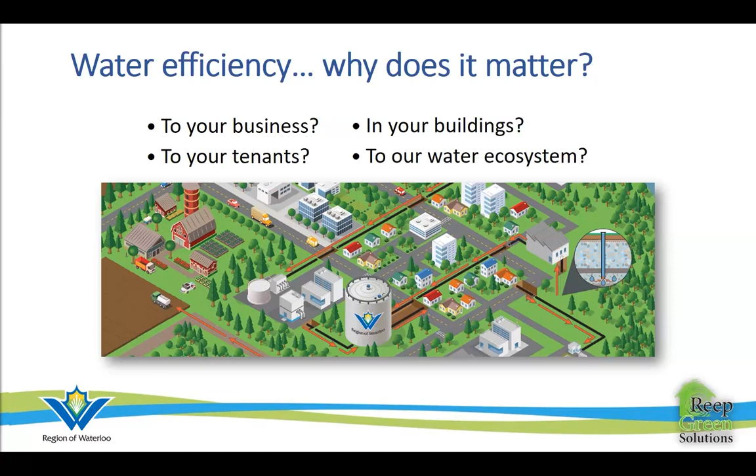And then again, educating tenants to recognize water loss problems and report them is also a great opportunity to lower our building's water consumption. Thanks, Nicole. That's a really great overview. More specifically, maybe you could dig into some of the benefits to property owners, and why they might consider replacing their water fixtures. Sure. So in multi-residential buildings, the water use can be out of your control if you have tenants.

You can try providing reminders and tools to promote water efficiency in your units, like shower timers or links to some of our webinars on our website and posters. But you can also try replacing water fixtures and or upgrading water appliances. By replacing fixtures, like upgrading to 3-liter per flush toilets or more efficient shower heads, you can save money on your water bills. You can help to discover and fix leaks in your buildings and protect our resources. You can also promote your building as a more environmentally friendly building to future tenants with the use of the newest water efficient fixtures and technologies.

You can also benefit by receiving money from the region, either through our toilet flapper and fixture replacement program or our multi-residential funding program. And if you're wondering if your tenants have a higher than usual water bill compared to other buildings in the region, consider this. The average person in the Region of Waterloo uses approximately 4.5 cubic meters of water per month. And if your water bills are higher than this average, then you're considered a higher than average water user.

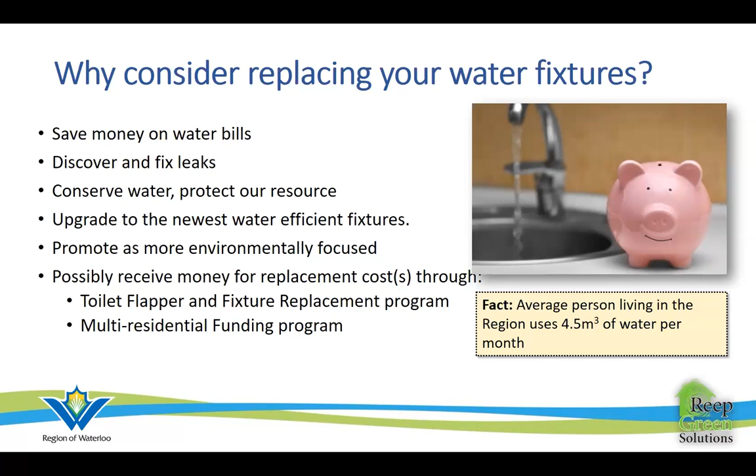So the region offers support and funding to make water efficiency projects easier through a variety of programs. One of these programs that we have is our toilet flapper and fixture replacement program. It offers participants an instant $15 rebate for every toilet flapper replaced.

And when you apply for the program, you can also request free water efficient shower heads and tap aerators that we at the region would ship to you so that you can install as part of your project. And this program really benefits buildings with suspected toilet leaks and/or older fixtures. It's recommended that the toilet flappers in general be replaced every 3 to 5 years because they can degrade.

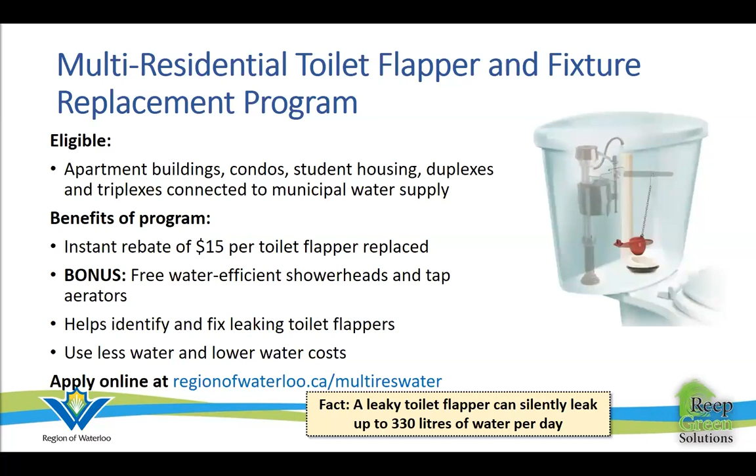So it's a really great opportunity for you to increase your water savings while also receiving an instant rebate from the region, and again, the free shower heads and aerators. Something to keep in mind, a leaky toilet flapper can silently leak up to 330 liters of water per day. So that can really add up on water bills. And if you're interested in applying for this program, you can apply at regionofwaterloo.ca/multi-res water.

So we do have a couple of success stories. The one I'll talk about is we had a participant who replaced 73 of their toilet flappers in an older apartment building. And with this one small switch, they saved more than 2,000 cubic meters of water per year, which is equal to savings of more than $12,000 for the year for the building. And since the cost of the toilet flappers actually were rebated by the region, the only cost of the project were the plumbing costs. And this participant actually saw a payback period of less than a year.

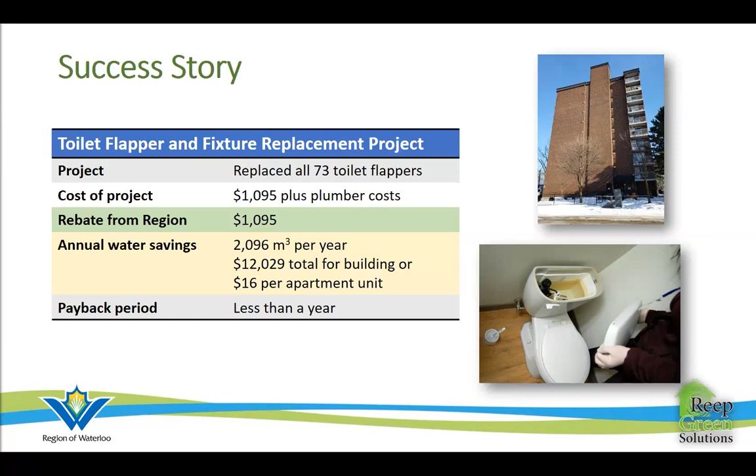One thing to keep in mind is that buildings with above average use of water are more likely to see a greater impact from replacing toilet flappers alone. And then the best way to see the maximum benefit from this particular program is to replace all the toilet flappers in your building. It's also a great opportunity to educate your tenants on possible signs of a leaking toilet, like if there's continuous running water. They can also use food coloring to test for leaks and things like that.

So we actually have another program that I'd love to tell you about, which is our multi-residential high-rise funding program. And this program is a good fit for larger buildings and for those who are okay having a longer wait for the funding, because funding amounts for this program are based on the total capital costs spent on the project, as well as the water savings achieved by the project, by which we look at the water used by the building the year before the project and the year after the project was completed. And then the building must also have a minimum payback period of at least 2 years.

And because of the way the funding is calculated for this program, using that water billing data from the year before and the year after, you might not receive your rebate for this program for up to 2 years post-project completion. So it's a bit of a longer wait than the toilet flapper fixture replacement program.

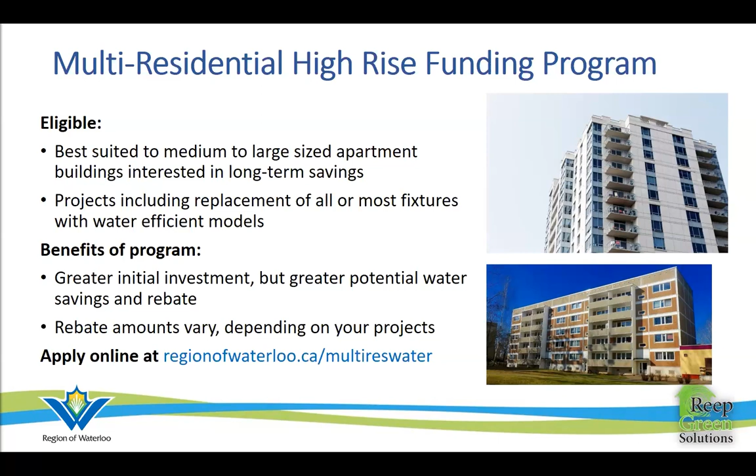And then the water savings achieved through this program also depends on the age of fixtures in your building. Like I mentioned before, replacing older inefficient toilets and shower heads has a bigger impact on your water use than newer ones. And then the size of the building, whether or not all of the fixtures are replaced or just some, the type of fixtures being installed, and then the typical water use in the building. And this program can also be applied to at regionofwaterloo.ca/multi-res water.

And I believe we also have the success story for this one. So water efficiency upgrades are worth it all on their own in the long run. But this success story demonstrates how the region can help support you in the process of achieving improved water efficiency and water savings. So in this case, a property manager owned a 140 unit apartment building and wanted to proactively reduce the per unit high water use. They replaced all of the toilets, the tap aerators, and the shower heads for all units in the building. And each unit had 2 bathrooms. So they actually replaced 280 toilets with 3-liter per flush models.

And then post-project, after calculating the water savings and the payback period, the region was able to provide this participant with more than a $5,500 rebate in funding. And the building also now uses 5,000 cubic meters less of water each year, and saw savings of more than $18,000 based on the city of Waterloo's current water rates at the time of the project.

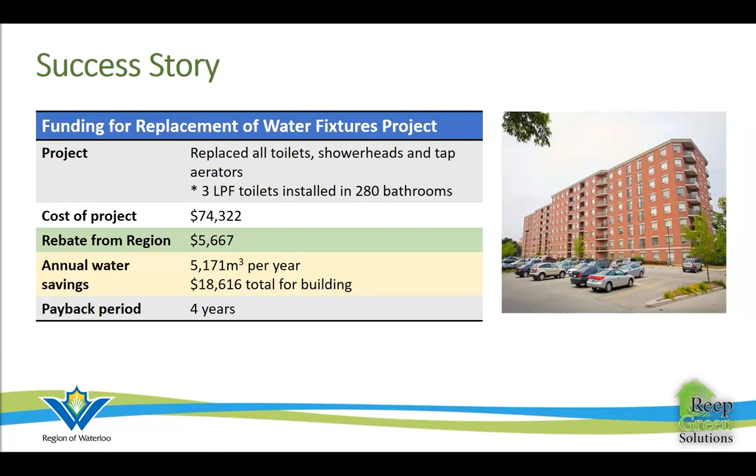So at this point, I'd like to bring Wayne into the conversation. So Wayne, I understand that metering water at individual units is a good way to achieve water savings. So what are some of the benefits you can tell us about from sub-metering? Okay, thanks, Patrick, for that introduction. Today, I'd like to talk to everyone about the value of sub-metering multi-res properties where there is only one single city meter.

So what the region does to help property managers fund this project is we do a 50-50 cost sharing. We split the cost, and there is a maximum of 10,000 per property, but looking at an average over the last number of years, it's about $250 a meter, the region's half, that you can receive for many units.

So eligibility: properties have to be connected to the municipal water supply system within the Region of Waterloo, and they need to have completed the installation of sub-meters at that property and provide me with a copy of any paid invoicing so that I can calculate the rebate payable. Now, not so much eligibility as practicality, the plumbing must be conducive to sub-metering installations, and I can talk a little more about that as I go through these slides.

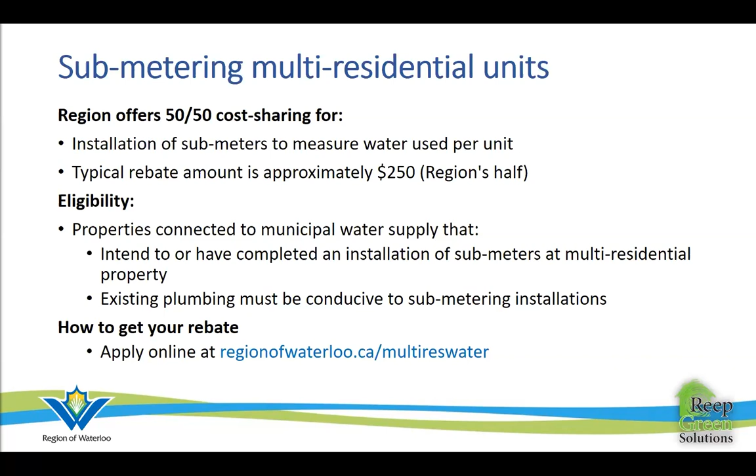As per Nicole's presentation, you would apply online for this program at regionofwaterloo.ca/multireswater, where you'll find all the information and forms required. So next slide, please, Patrick.

Thank you. So why sub-meter? Well, you can now bill tenants fairly for the water that they actually use, not just applying some sort of mathematical division, which if there's some sort of leak, like a toilet running, you're not going to know where it is. Everyone's sharing the cost of what is essentially one unit's responsibility. And so it's only fair.

Now, the bottom line is sub-metering a multi-res property will encourage water efficient changes in behavior that will lower the water use on average around 15%. And this has been shown because now they're being billed on their actual cubic meters of water usage, and any issues can be identified, located, repaired, dealt with. And as the next bullet says, it identifies leaks and high water use. It allows you to focus where your attention needs to be focused.

I have seen a situation where there was a leak under a unit in a townhouse complex, a lot of water running into the ground, and they would have never known where to rip up the concrete as they had to without some sub-metering.

Now, sub-metering companies can provide, of course, the supply and installation of the sub-meters, and they can provide data collection services. They can reconcile with the city bill, they can send bills to the tenants, and they can provide services up to and including collections of the monies owed.

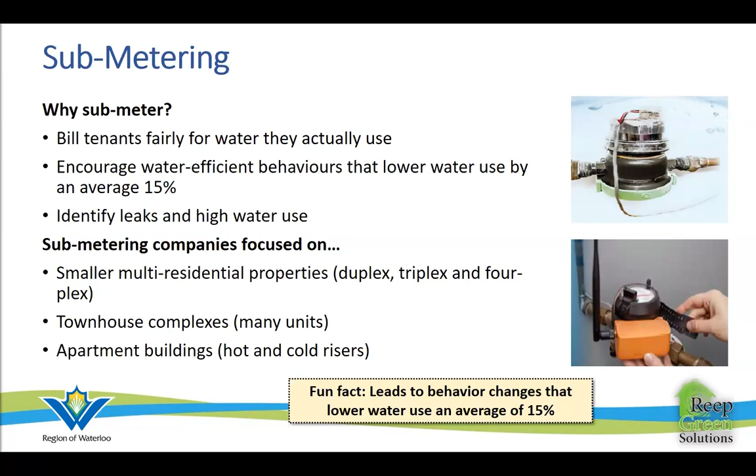So as far as case studies, the large townhouse properties, this is really where the program got going around 10 years ago, where each townhouse unit is submetered for individual water usage in cubic meters. The plumbing tends to be a bit more straightforward in townhouses. There tends to be one supply line into the unit. And in the last 10 years, I've done 19 townhouses. They've received funding for submetering, and that's a lot of units.

And they're apartment buildings. Now, because they're students, you might find in this situation they're probably not billing the tenants specifically, but they are receiving data on where the water's going. I know those places, they tend to have 4 students maybe in one unit, the way their architecture is arranged. At least you can focus your efforts as property managers on where to deal with it. Do you have to deal with tenants and say, don't leave that tap running, or do you have to fix something? So that's sort of the overview of submetering.

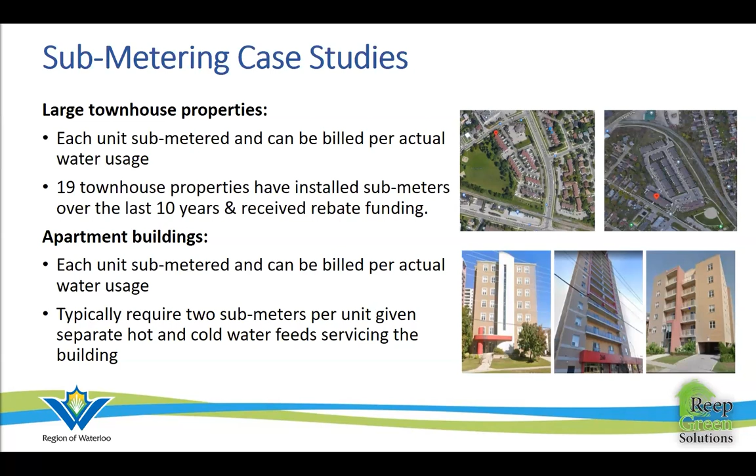So at this point, I think it's helpful to take a step back and better understand how to prioritize some of the water saving measures that Wayne and Nicole described. So Brendan, you've got a lot of experience doing water audits. What are some of the main things that you look for when you're doing a water audit?

Yeah, well, just to start off, what we typically do when we do a water audit on a building: we would do an on-site inspection where we come in and look at the fixtures in the building. We'd look at the mechanical room and the shared spaces, and then we'd look at the fixtures in some of the individual units. We usually do about 10 units, and look at the toilets and showers and faucets and any sort of appliances that may be in there, dishwashers or washing machines, that sort of thing.

We also install a smart meter on the main water meter. That was the orange meter that Wayne had a picture of in one of the previous slides there, and that allows us to collect some smart meter data. We can more closely monitor the usage, and we do that for about a week.

And it shows us each time of day how much water is being used, and that way we can do a little analysis of things like how much water is due to leaks. We can tell that by looking at the usage overnight, at times of the night when there normally wouldn't be any or hardly any usage. And so we do that for a week and then go back and collect that meter. And then we send a report that has an analysis of where the water usage is and things you might be able to do to reduce it.

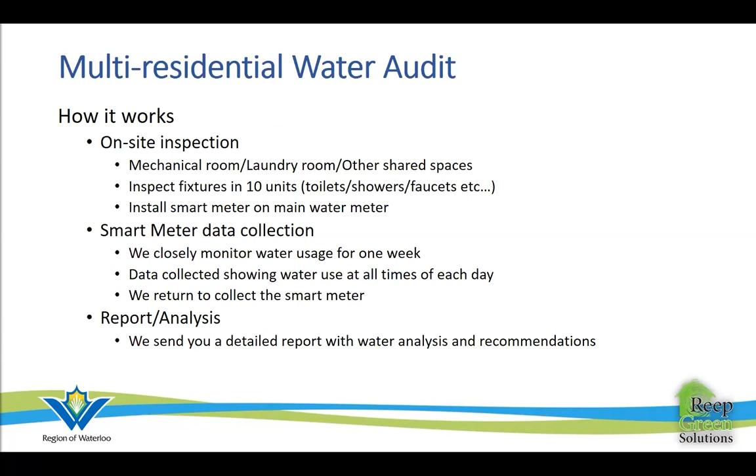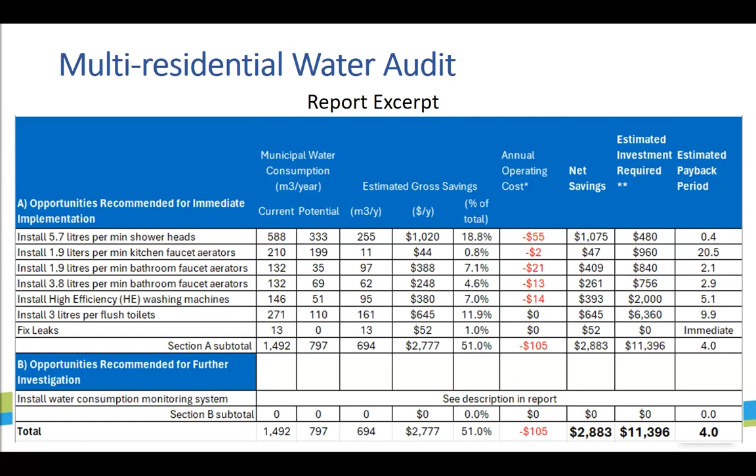On the next slide, this is part of the report that we would send. It gives a chart with where the savings opportunities are for each of the different fixtures or areas of the building. You can see on the left side there, it lists some recommended upgrades to make and the amount that you would save from doing that versus how much it costs to do it, and then it gives you an estimate of how long that takes to pay off. And as you can see, it's a pretty detailed analysis, and you can then decide which of the fixture replacements are going to be your better bet and pay off more for you.

Certainly it takes time for that to pay itself back, but the savings just keep on going even after that payback period. The next slide is larger buildings. You can see it's a little bit even better payback on these. These are actual buildings that we've done, so this is not theoretical but more practical, hands-on. This is what we've seen in terms of the possibilities for these buildings. And you can see the average is 36% return on investment, which is obviously a huge return on investment. So it really is a good business decision to do some of these things that are going to make a big difference.

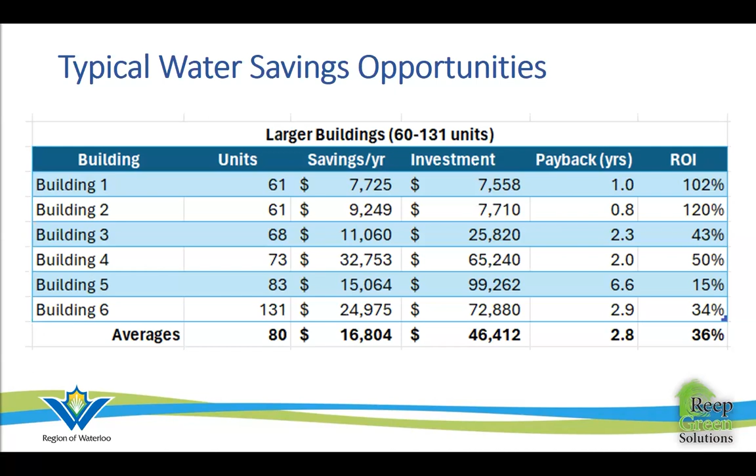In the next slide we have some different types of upgrades that we recommend typically. Fixing leaks is a really big one, and it's kind of a no-brainer. Usually it's toilets that are leaking. That's the most common, and that's usually a pretty simple thing to fix. That's fairly inexpensive. Usually it entails just replacing the rubber flapper, which Nicole was talking about, the program that the region has for offsetting that cost, but it's a fairly simple thing to do, and it does pay back high dividends.

So replacing the flapper, or sometimes it's just a matter of adjusting the valves so that the water level in the tank isn't overflowing into the overflow. That's an even easier one oftentimes to do. But upgrading shower heads is another thing that is really important and does save a lot, and it's a fairly inexpensive and simple thing to do. Showers tend to be the biggest use of water in residential settings, so upgrading to a higher efficiency shower head can often cut the amount of water being used by showers right in half. So it's really an easy and a good one to do.

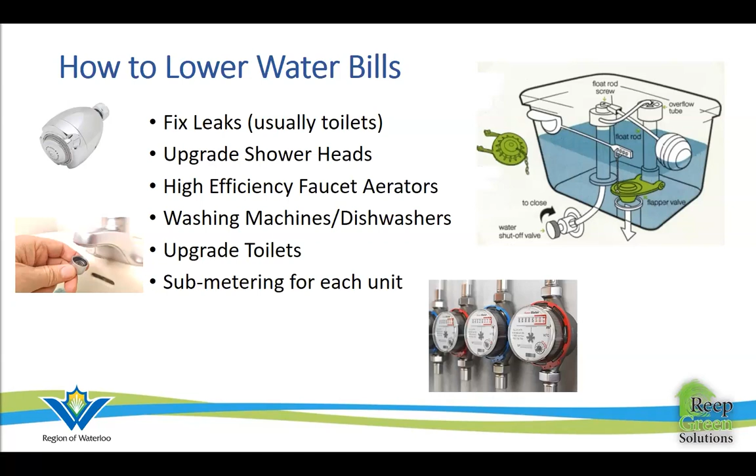Aerators is another one, the little ends that go on the faucets, and that can help save. Washing machines and dishwashers are also good. It's a little bit higher investment, but sometimes that does make a big difference that can pay off as well. Upgrading toilets to higher efficiency toilets, we've talked about that, and that's often a part of some of the incentive programs that the region has. And then again, we talked about submetering, and Wayne was telling you a bit about how that affects saving water. Salt management is another thing that we like to encourage.

It's not exactly in the same ballpark as saving water. It's not really the same issue, but it is an important issue in conserving our natural resource of water that we need for drinking water and for our municipal water. Mostly we're talking about salt used for winter maintenance that's being put on driveways and parking areas. Basically what's happening is that the salt we put down is getting into the underground aquifers that we use for drinking water in the region, and starting to contaminate the water supply. So we're really trying to encourage efficient use of that salt, and best practices that keep it out of the groundwater.

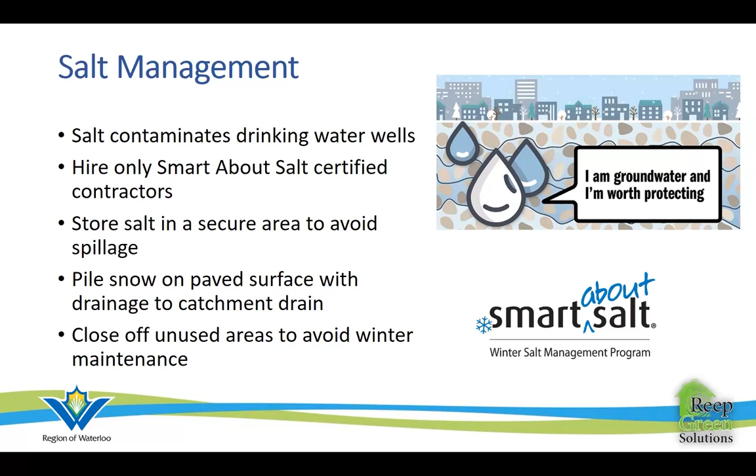Smart About Salt is a program that educates building owners, but also winter maintenance contractors. So a big part of this push is to make sure that building managers and building owners are hiring contractors who are Smart About Salt certified. That means they've been trained and they know about storing salt in a secure area to avoid spillage, piling the snow on a paved surface and making sure that the drainage is going to a catchment or somewhere that's not going to go into the groundwater. And then possibly closing off unused areas that require maintenance in the winter, to reduce the amount of maintenance you're having to do. Patio areas or different areas that aren't needed in the winter, that you then don't need to plow and salt. So that's kind of the gist of the salt management aspect of water conservation.